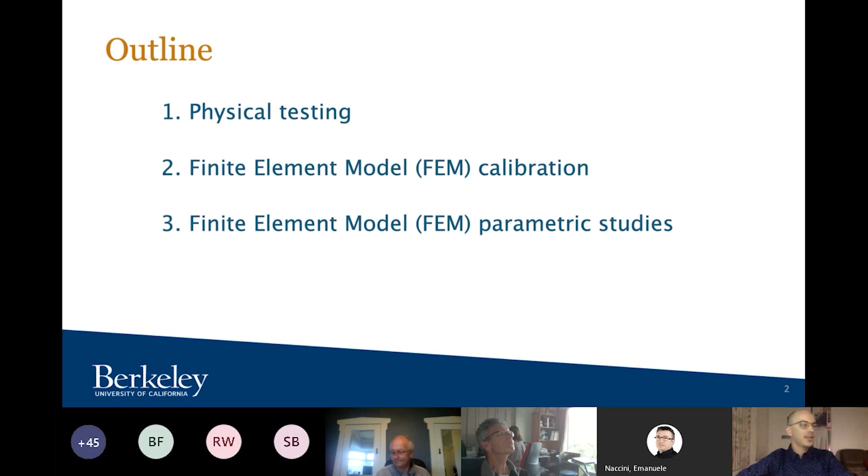So let's get started. My presentation will first talk about the physical tests that we've run here. Then I'll explain the finite element model calibrations that we've been working on, and finally some of the parametric studies.

So just to make sure we're all on the same page, I'm talking about what you see on the screen: column foundation connections with cast-in-place headed anchors. When you have your column, it has to connect to the foundation. We have to do that in some way, and cast-in-place anchors are one of the most common ways to do that. So on the picture on your right, you can see what these connections might look like.

Before the concrete is cast, you have the rebar, the slab, and you have to hold the anchor in place. You might not see it in the picture, but at the base of the anchor, there has to be some kind of head, a nut, a bulb, or something, so that when you pull the anchor out, it gets stuck in the concrete.

Once you pour the concrete and remove the forms, the tops of the anchors are sticking out, and then you place the column on top and you can bolt it down with some type of anchor. This is a very common construction type in the US, and I'm assuming in New Zealand as well.

But even though it is very common, there isn't much consensus as to how these should be designed, which is somewhat concerning given how common these connections are. I'm focusing mainly on the concrete portion of these connections, not so much the base plate and the welds and that sort. I'm talking about the failure of the concrete.

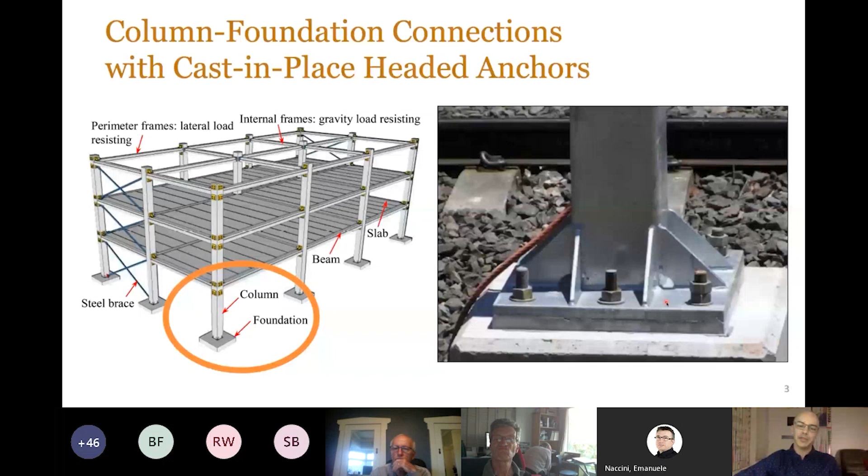There are multiple methods for designing these connections, and there's very little agreement as to which method should be used when designing these anchors. One of these methods is what we call the breakout equations. It's chapter 17 in the American Concrete Institute code, and it also happens to be chapter 17 in the New Zealand code.

Basically, if you have a moment acting on a column that's resolved by a tension compression couple, and if this tensile force is large enough, this method says that you would expect to see a failure mode where you rip out a chunk of concrete in the shape of a cone. This failure mode is often called the concrete cone failure or the breakout cone failure mode.

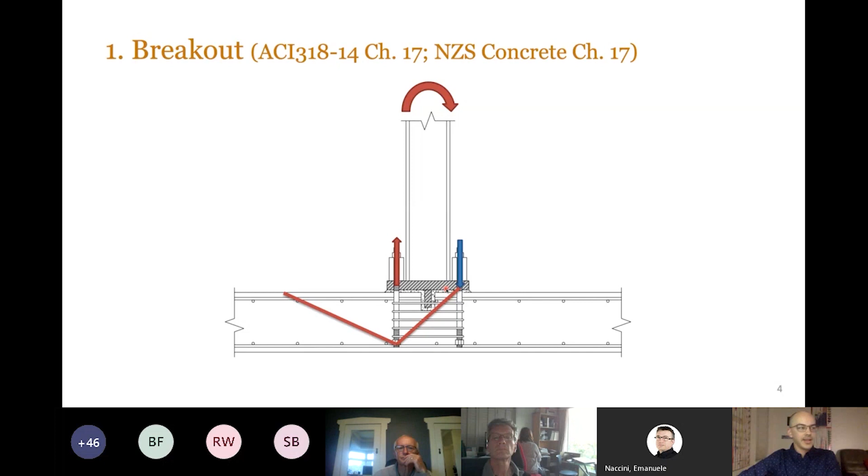And we have equations calibrated to calculate the strength of these connections. But these equations tend to be very conservative, and people try not to use them. Also, if you use any of the software by some of the fabricators of anchors, like Hilti and whatnot, they use this method. But a lot of people shy away from it. They say it's very conservative, which it is, and they argue that we should be able to use other methods.

Say this, number 2, strut-and-tie models. If we load the column in the same way, we have a tensile force on the left, but in this case, we'll have a diagonal compression strut along the joint. And the argument here is if you make that strut strong enough to be able to resist these forces, then you should be fine. You shouldn't get any kind of breakout cone, and we can ignore the breakout equations completely, not even have to check them.

Other engineers argue that even that's too complex. We can use this simpler version. How about we use the horizontal joint shear equations? These are just the traditional joint equations for concrete beam column joints.

If you look on the left, there's a diagram of a roof joint. So the column terminates and you have beams framing in from the sides. If we flip this upside down, the argument goes, the force flow is very similar, so these equations should apply to this type of connection. We simply have to size the joint such that the horizontal joint shear is resisted, and again, we can ignore the breakout failure modes, and we don't even have to check for them.

So we have 3 methods to design the same connection. That would be fine if these 3 methods gave us similar results, but they don't. There's about an order of magnitude difference between these results, and that's quite concerning, especially because it's not common that people check with these different methods. They just tend to pick one and stick with it.

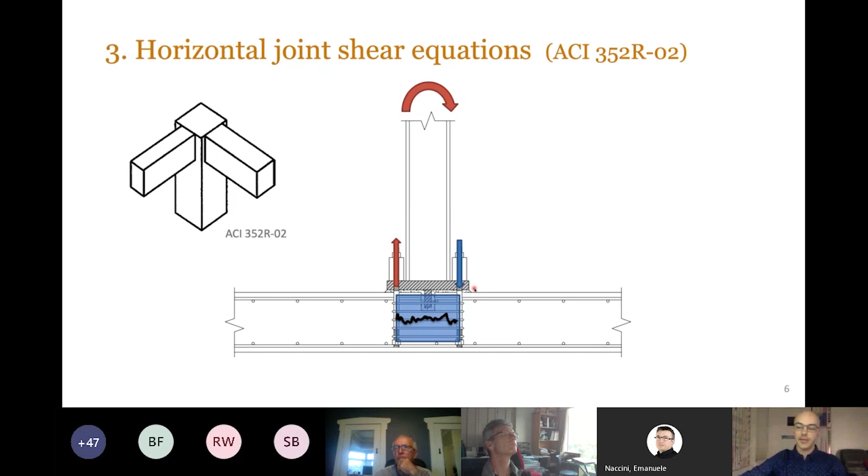So that was one of the first projects I did when I first started my work here at Berkeley. We designed and built and tested a full-scale column foundation connection. So here we have a steel column in the middle. It's anchored to the foundation with 2 anchor groups, one on each side. And we have our foundation slab along the bottom.

It's 18 inches thick, and you're going to have to forgive all my crazy American units. I grew up with the metric system in Costa Rica, but I've been here for 4 years and kind of gotten used to these crazy units, about 45 centimeters or so thick.

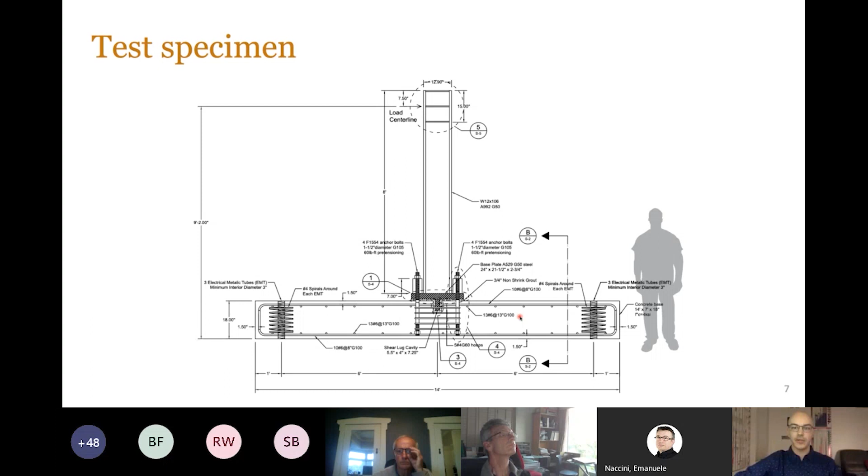So as you can see, this is quite concerning. These equations are very different, and we're trying to analyze one connection. We shouldn't have such a difference here.

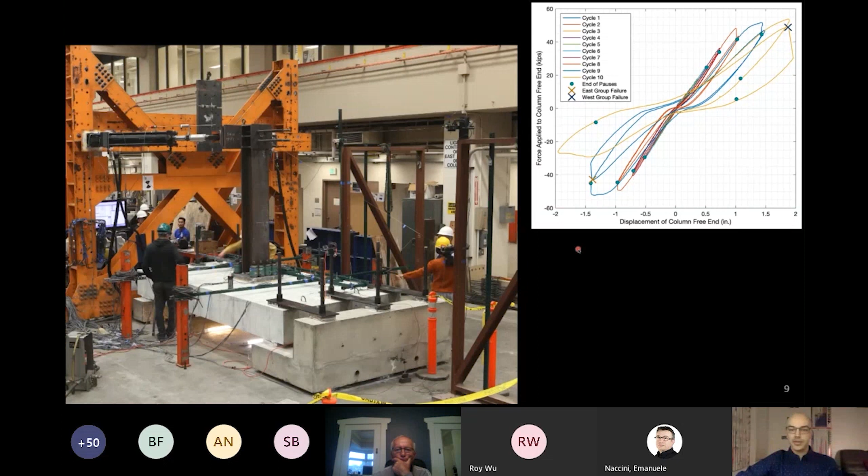One of the first observations that we wanted to see with this test is what failure mode do we get? Each of these 3 methods describes a different failure mode: concrete cone failure, joint failure, etc. So the first thing we looked for was what kind of failure did we get?

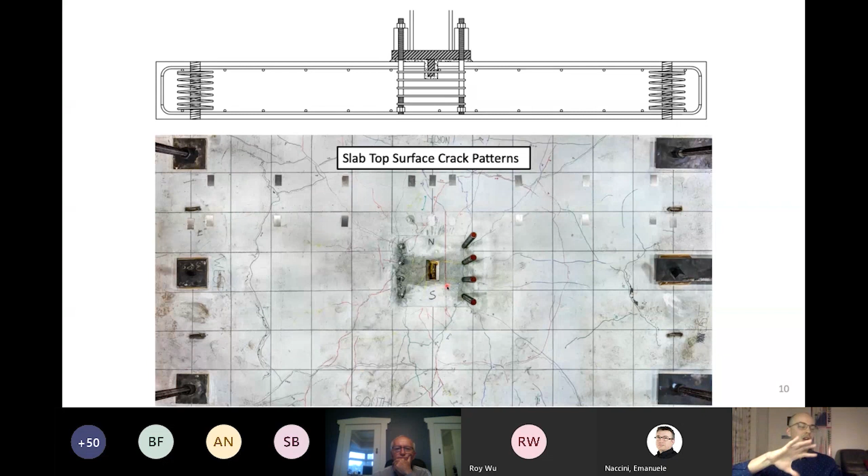Here on the top, you can see a cross-section of the slab, and on the bottom, I'm showing a picture of the top surface of the slab after testing, so you can see all the cracks that were highlighted there. I wanted to point out the failure cones. We did, in fact, see concrete failure cones, even though the proponents of the Strut-and-tie models say that these failure cones don't happen for this geometry. We did see them.

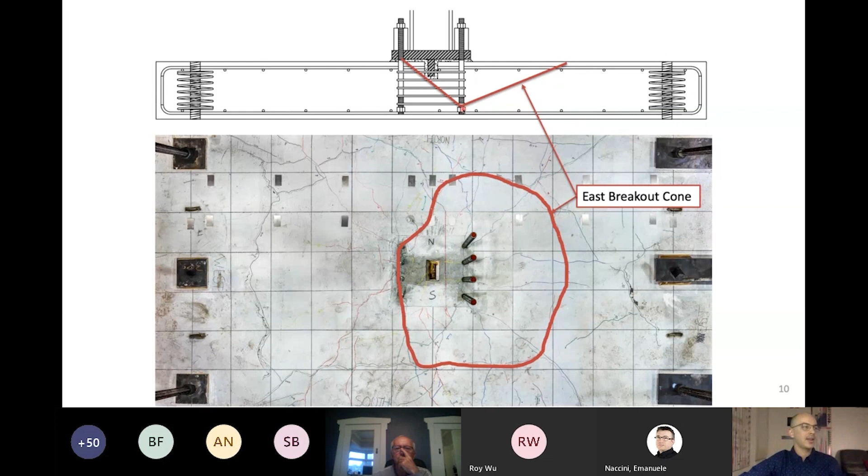As we were loading in one direction, we saw one cone. The cone originates at the head, and as it shoots up towards the surface, when it intersects the surface, we get a more or less circular pattern. So we saw that crack on one side. Then we loaded in the other direction, and we also got our breakout failure cone.

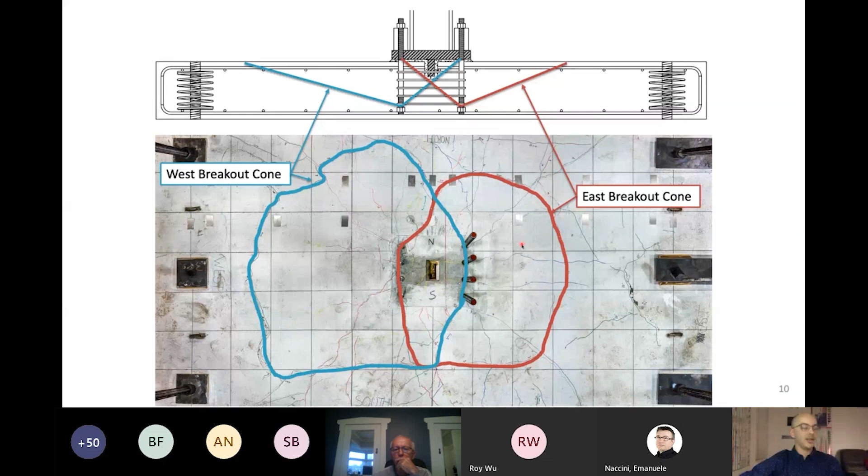So that should maybe give you an idea of what method might be the most appropriate for designing these connections. If we saw a breakout failure, maybe the breakout equations would be the best.

So if I bring back this table or graph I showed you before with the load that each method predicted, I can add 2 columns for the measured loads. Even though we just had one specimen, we had 2 anchor groups, east and west, so we have 2 failure loads. If we take the average of these 2 as 100%, the breakout equations, even with all the safety

factors taken out, only reach 58% of what was experimentally observed. So these breakout equations still seem to be conservative, even after taking out some of these additional safety factors in these methods. Strut-and-tie model is way too low.

It really only serves as a lower bound solution. So the Strut-and-tie model tells us that our connection will resist more than 107 kilonewtons, which is correct, but not very useful for design.

And thirdly, the beam column joint equations don't seem to be a safe alternative. They over-predicted the strength by about 60%.

So because of this type of failure, we saw breakout type failure. It seems like these equations should be able to describe this type of failure, but they were quite conservative. So we are looking into reasons for this conservatism.

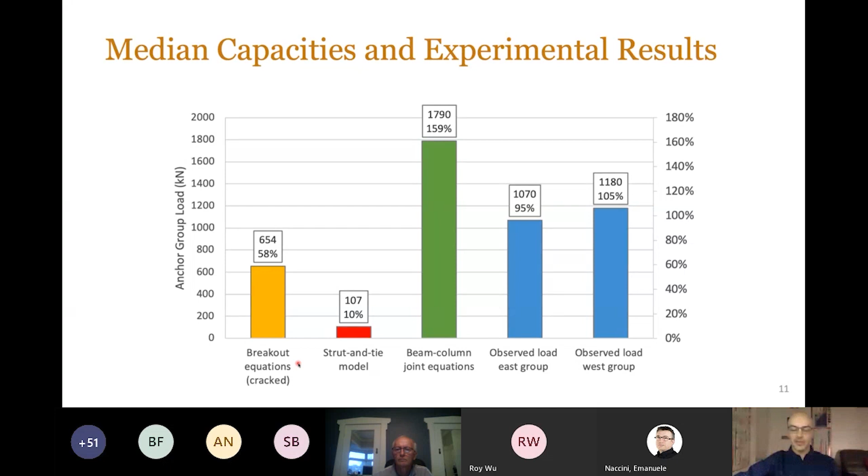So we started using software called ATENA for finite element modeling. It's not one of the more well-known softwares for reinforced concrete elements, but it was developed specifically for reinforced concrete. The way it deals with concrete is different from any other software, and it seems to behave really well. We tend to get good results with this software. It was developed in the Czech Republic, and for quite some time now, they tend to do very well whenever there are blind prediction competitions.

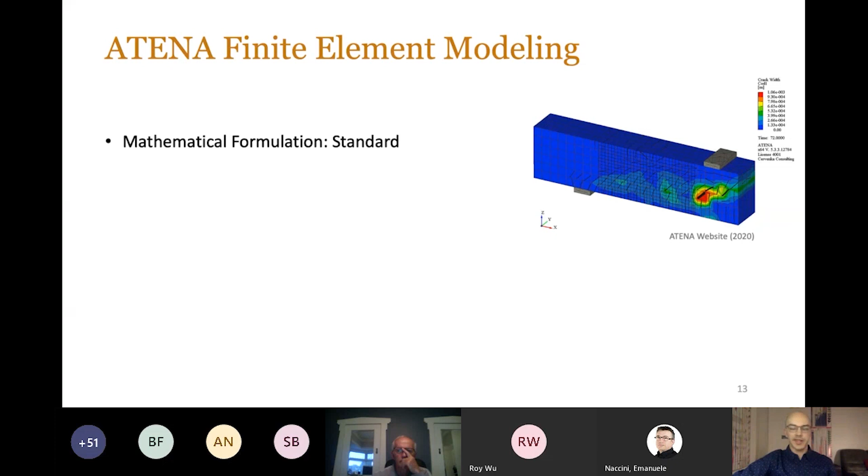So we decided to use this software, and there's just a couple aspects of the software I wanted to highlight for you. First, the mathematical formulation for this finite element software is very standard. There's nothing too noteworthy about it. What makes it different is the material model, how it describes concrete, and specifically how it describes concrete in tension.

One of the initial basic assumptions when designing with concrete, you start off by assuming concrete has no tensile capacity. That is usually a conservative simplification, and the results are good enough to work with. But for anchors, when you anchor something into concrete, it's really the tensile capacity of concrete that holds anchors in place. If you were to ignore the tensile capacity of concrete, anchors would just be falling out of the walls, but they don't. So the tensile capacity of concrete is what we're really interested in.

The technical term for this model is that it's an orthotropic smeared crack formulation with a crack band model. And there's a few aspects about it I wanted to highlight.

First is the exponential softening. So when you load concrete in tension, it usually follows an elastic curve up until you reach the maximum tensile stress. After that point, you get a crack that forms, but it's not a sudden drop in capacity. There is an exponential softening as you slowly drop in stress. That's the diagram I'm showing here on the right. This is the stress along the crack on the vertical axis, and the crack width on the other axis. So as the crack opens, the stress drops slowly, it drops exponentially.

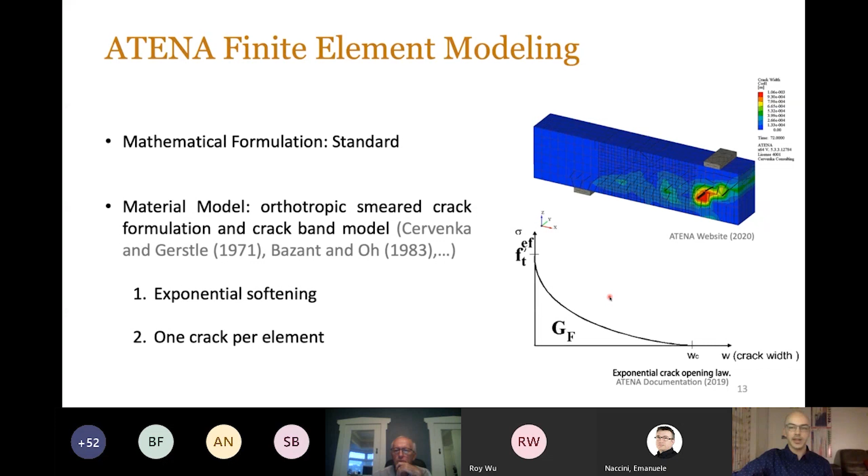So we decided to use this software and build up a finite element model of our connection, to try to run some parametric studies and understand the behavior of these connections a little bit better.

And we had to start off by calibrating this model. Just to define the concrete material, there are over 20 parameters that must be calibrated. There are different ways you could try to model the anchor itself. You could think of it as just a 1D element that only carries tension, or you could try to model the full anchor itself. There are also different contacts between the concrete and the steel. So how does the anchor interact with the concrete? Also, how does the base plate, as it pushes down on the concrete, how is that contact defined?

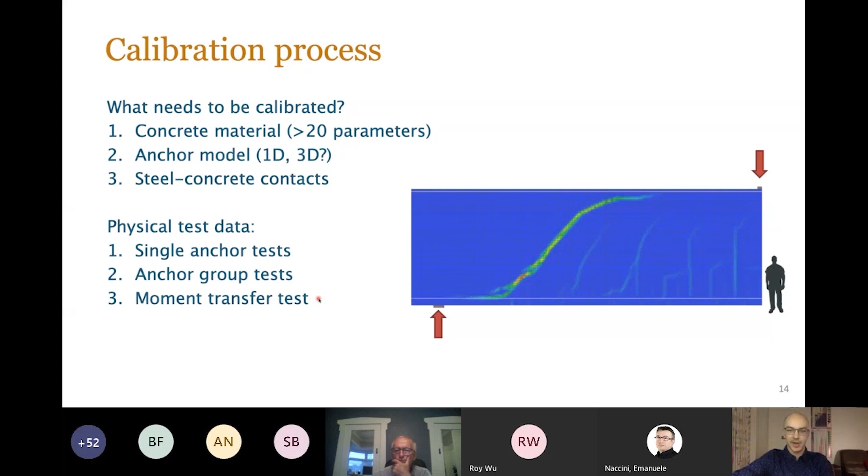So in order to get all these aspects right, we used a lot of physical data to calibrate our models. We had a lot of single anchor tests. Then we moved on to groups of anchors. And finally, we calibrated the moment transfer test, the original experiment I showed you at the beginning.

But we decided, let me go back one slide.

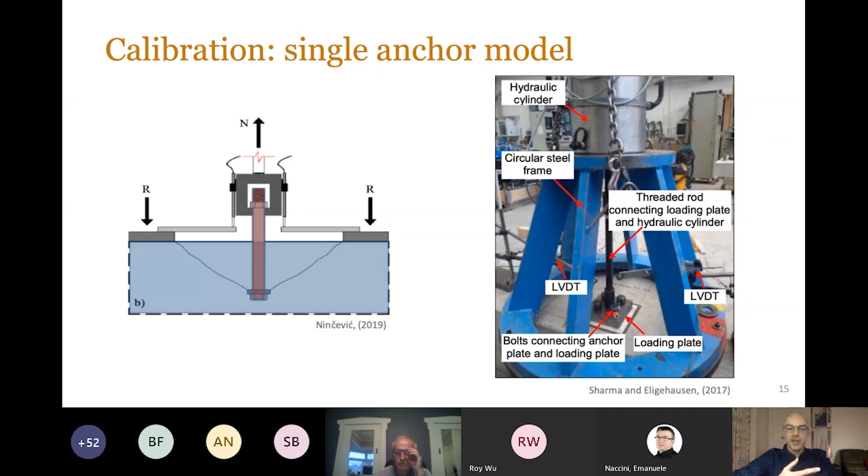With this data, what we did was create a finite element model to try to simulate this experiment. This experiment is symmetric in the x and y direction, so we only need to model a quarter of it, because each quarter behaves exactly the same. So that's what I'm showing here.

If you focus on the left, this is a quarter of the specimen. The steel anchor is placed here in the middle. It's being pulled up, and out here you should see the outline of the ring support, which is holding it down. The colors on this diagram are showing the width of the crack as it opens up. So the cracks originate at the anchor head, which is here. I turned off the steel material so we could see the concrete better, but the anchor is placed right here in this corner.

You can see the cracks as they propagate towards the surface form a cone shape. And if this video should work, you can see where the cracks originate at the head and shoot up towards the surface as we load.

On the right, I'm showing the tensile stresses, so the redder means the higher the tension stress. What you can see in this diagram is that as the crack opens, the stresses start to drop along that crack. That means the crack has opened, and not only did we see the crack open, but it opened so far that there are no longer stresses traveling across that plane, because remember that we have the exponential softening after you reach the peak stress.

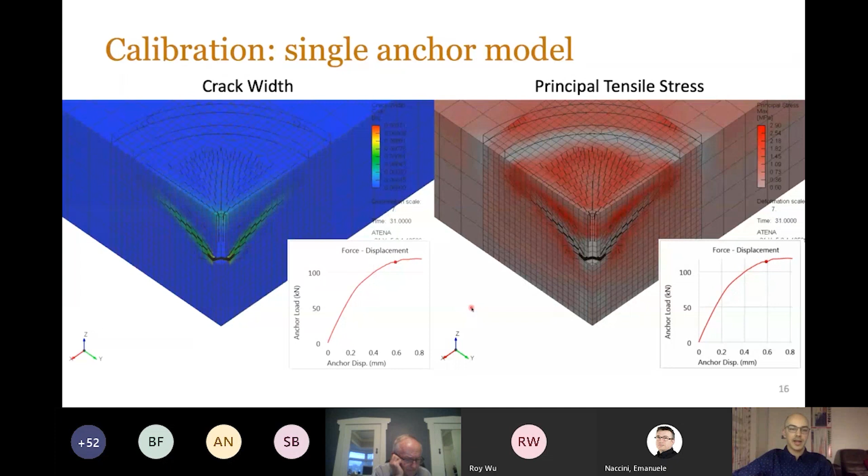Once we had these crack patterns behaving correctly, it makes sense to move on and look at the load displacement curves. So I'll show you that right now.

These two diagrams show in gray some experimental results from single anchor tests. I wanted to highlight here on the left, even though these are four physical tests of identical anchors placed in the same concrete, there's quite a lot of variation in the peak strength. This one failed at about 120 kilonewtons, this one at about 100, so there's about a 20% variation in the strengths of these anchors. This is experimental data, so it's challenging to calibrate a finite element model to a phenomenon that's quite variable itself.

To try to get this spread of the data and understand it a bit better, in all the diagrams I'm going to show you, we ran multiple finite element models, with different mesh sizes and slightly different concrete properties to try to get the spread of the data a little bit better. Even the developers of this software themselves admit that if your finite element results are plus or minus 15% compared to the physical test, that's considered a very successful model.

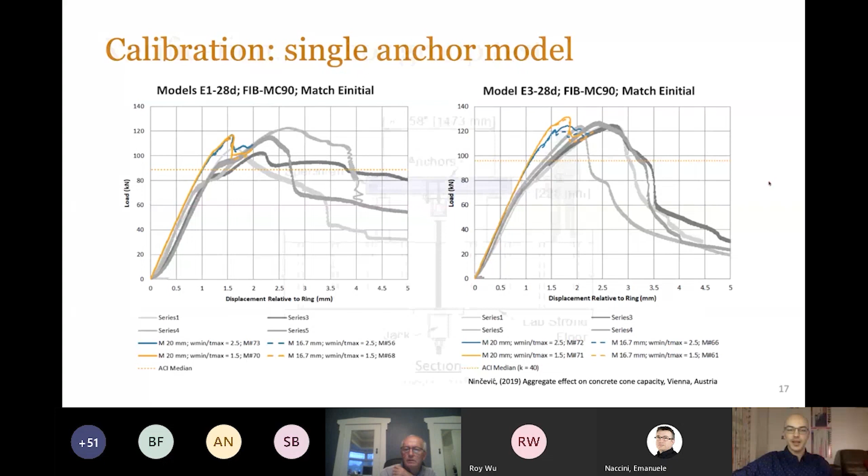With those lessons learned, we moved on to the calibration of some group anchor tests. These groups of anchors were actually tested here at Berkeley as well, by another graduate student a few years ago.

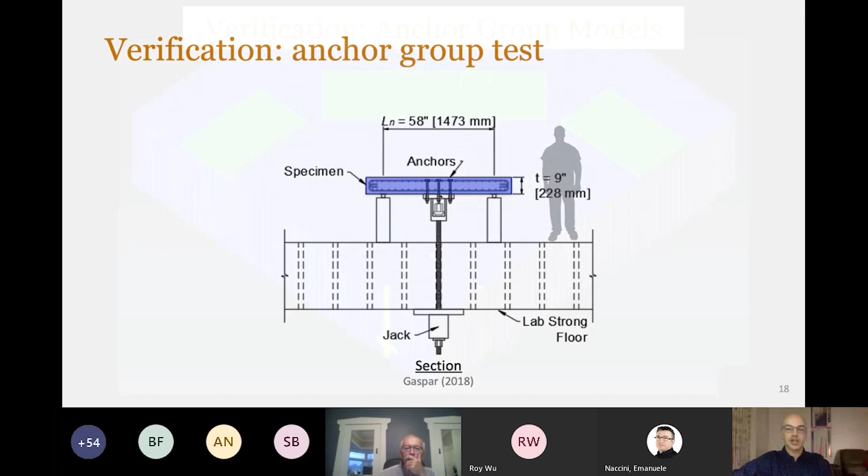In these tests, we have our concrete slab here, and we have our anchors, which are attached from the bottom, and we're pulling down on these anchors. This experiment was also symmetric in the X and Y directions, so the model we built is just a quarter model. Every quarter behaves exactly the same.

Here I flipped it upside down, so you can see the anchors. These are being pulled up. These green plates on the top are the reaction plates.

I just wanted to stop here a second and ask you, what should the crack patterns look like? If this model works correctly, the crack patterns should make sense with the experimental data, but you should also start to get a feel of what these patterns should look like.

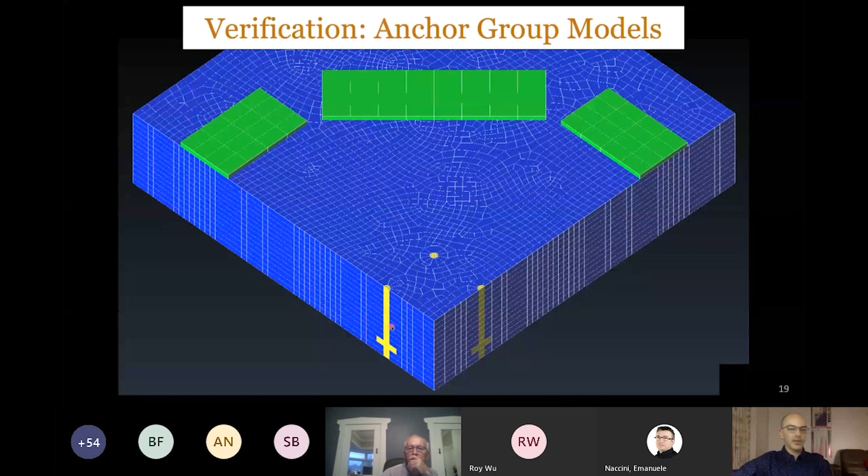So if I go forward one slide, on the right here you can see the crack patterns. At first, as we loaded this model, we started to get a lot of surface cracking. This is flexural cracking, just because we have a large slab. This flexural cracking was significant. Then at some point later on, we got this nice cone-shaped failure.

The colors are representing how wide the crack has opened. Also, these anchors are placed closely enough together that their cones don't form an individual cone each, they form a group cone here.

This was consistent with the experimental results, depending on the size of the screen you're looking at this on. It might be hard to see, but here on the left, we did see a lot of flexural cracking, and then we had a sudden cone failure.

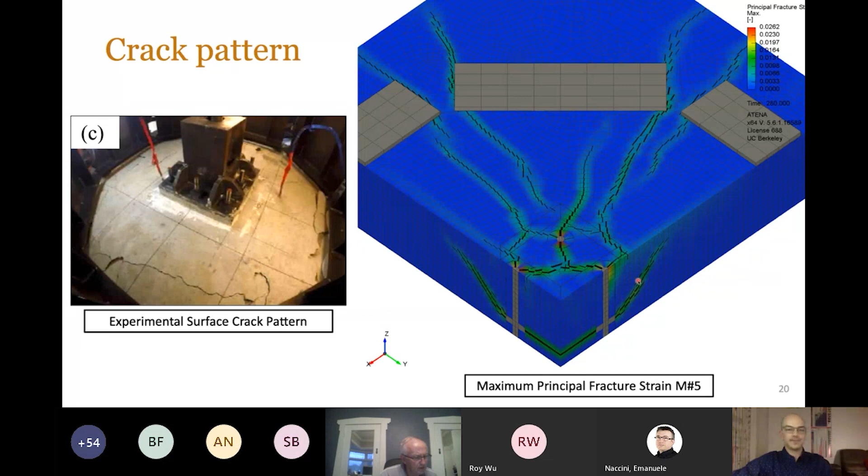So now that the crack pattern makes sense, we moved over to the load displacement curve. The gray line represents the experimental results, and we have 4 different finite element models with different mesh sizes, slightly different concrete properties. One thing we were quite happy with these models is that we were able to match the initial stiffness, the elastic stiffness.

If we hadn't been able to match the initial stiffness, I wouldn't trust anything after that once cracking and softening starts happening. So thankfully, we were able to match the initial stiffness very well. We had to do very little tweaking with the principles we learned from the single anchor tests moving over to the group anchors. And the peak load seems to match pretty well.

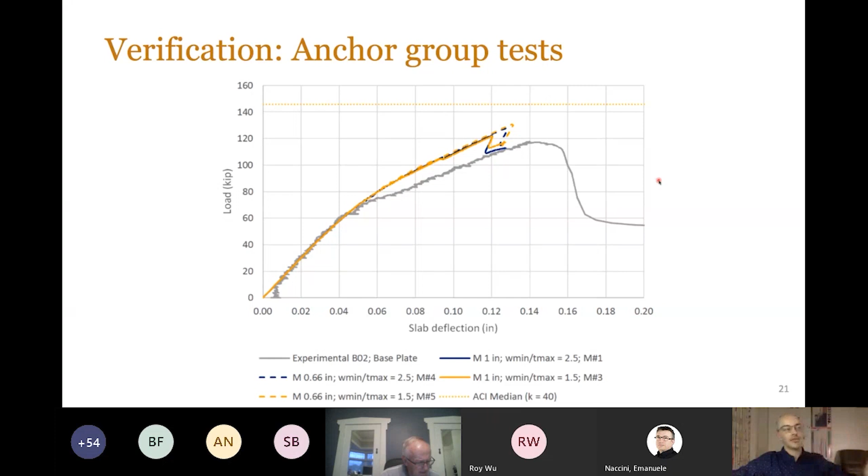Pretty happy with this. So we calibrated our models with different group anchor tests. This is just one I'm showing you. Once we did that, we were finally able to move back to the original goal, which was to model these moment transfer tests.

This specimen is only symmetric in one axis, so we did have to build half of a specimen. We couldn't go all the way down to a quarter. So here I'm showing the steel and fine concrete.

The pink layer is the fine concrete layer because that's where we expect most of the damage, and then coarser concrete towards the ends. If I turn off the concrete layer, you can see the rebar placement. We have a top mesh of rebar, bottom mesh, and then some hoops around the anchors. You can also see the anchors themselves are modeled as full 3D elements.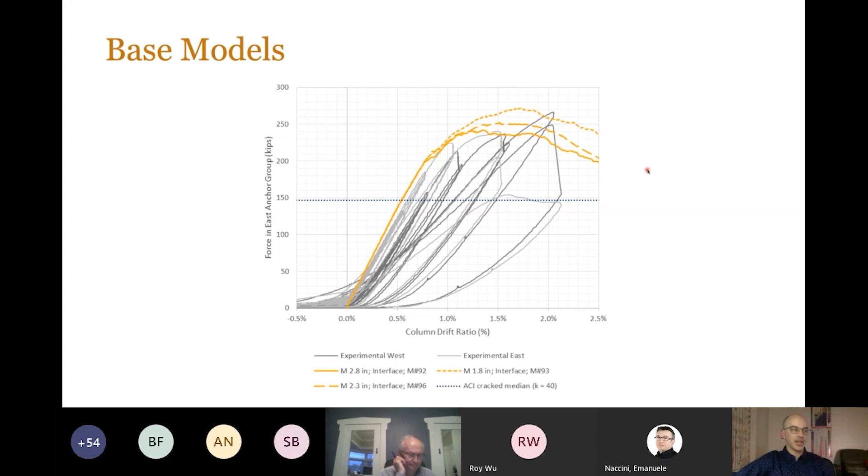So that was part 2 of the presentation, the calibration process. We spent a lot of time trying to calibrate these models because right now we're moving into parametric studies. I'm going to use this model to investigate some other types of geometry. Really what we're doing is extrapolating, and you have to be very careful when you extrapolate without physical data. We're basing ourselves on a physical test, but extrapolating out from there. So in order to build the most robust model we could, we went through the long process of calibrating our model with lots of single anchor tests, group anchors, and moment tests to build a model that's robust enough to extrapolate a bit.

This is the part of the research I'm working on right now. I'm using these parametric studies to investigate how we can improve these connections, how we can improve the breakout equations, and why they seem so conservative.

One of the most interesting or promising aspects about these connections is slab shear reinforcement. These specimens we tested had no shear reinforcement—it looks like the model on the left, with a mesh on top, a mesh on the bottom, and hoops. But what if we add shear reinforcement to this slab? There's another research project going on here at Berkeley looking at the benefits of adding shear reinforcement to foundation slabs, and it's becoming more common, especially for very tall buildings.

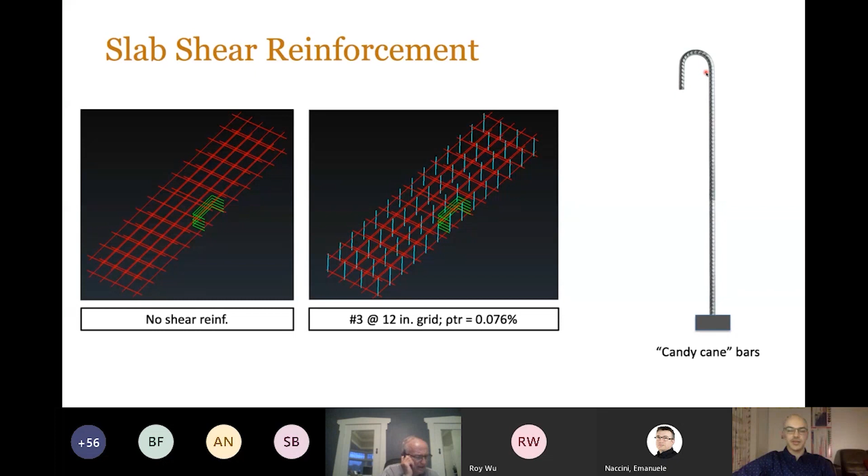So our question was, would that increase the strength of your column foundation connections? We ran different models with different amounts of reinforcing. This model here in the middle has about 0.076% reinforcing—that's just the area of the rebar divided by its tributary concrete area.

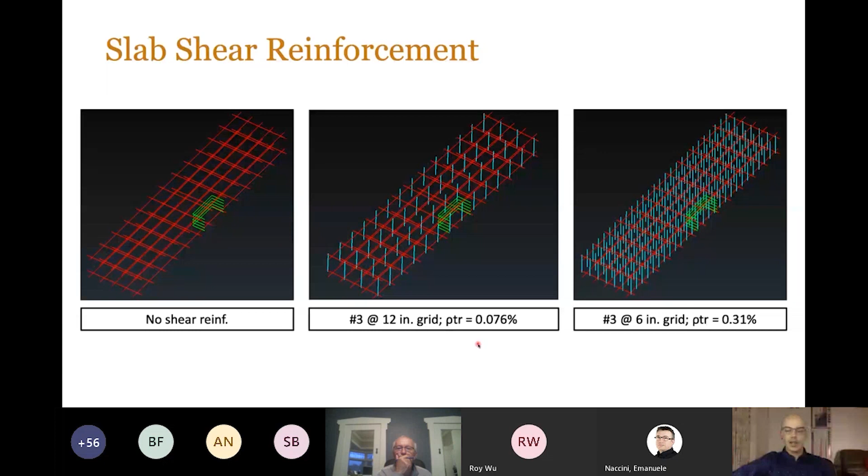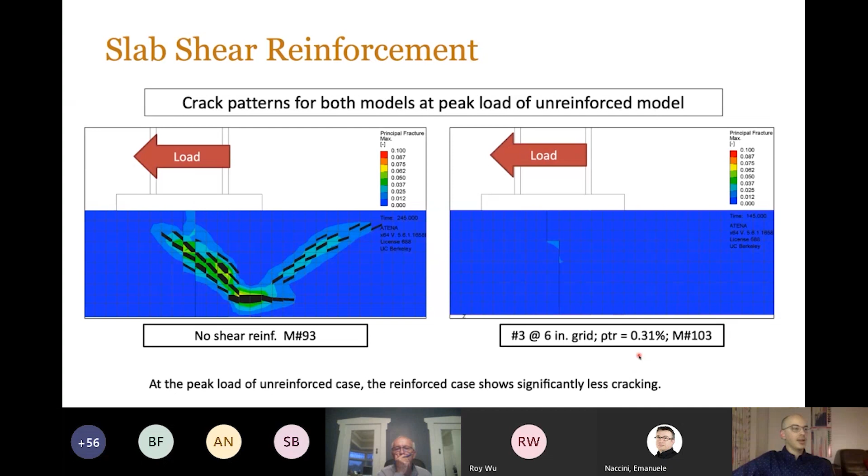Once again, let's look at the crack patterns—what happens with cracks when you add shear reinforcing? On the left, I'm showing the original model with no shear reinforcing. As we load the column, we get our cone failure mode, which I've shown a couple times. On the right, I'm showing the model with a high amount of shear reinforcing at the same load as the one on the left. You can see they're both loaded to the same load: the one on the left has failed, has no shear reinforcement; the one on the right is barely cracked. If we continue loading the one on the right, we do eventually get a cone type failure, but at a much higher load.

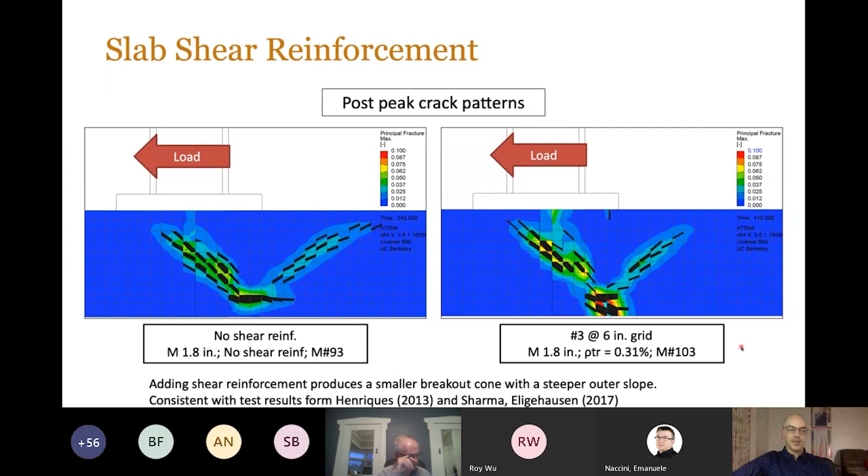This also makes sense with some of the few tests that have been run on how anchors and rebar interact. Different researchers have found that when you add rebar to these connections, the shape of the cone changes—instead of a very wide open cone, you get a much steeper, smaller cone. So these crack patterns seem to make sense.

It looks like if we add enough shear reinforcement, it boosts the breakout strength so much that the failure mode changes—we stop getting clear cones and start getting joint failures. I'll show that in the next slide.

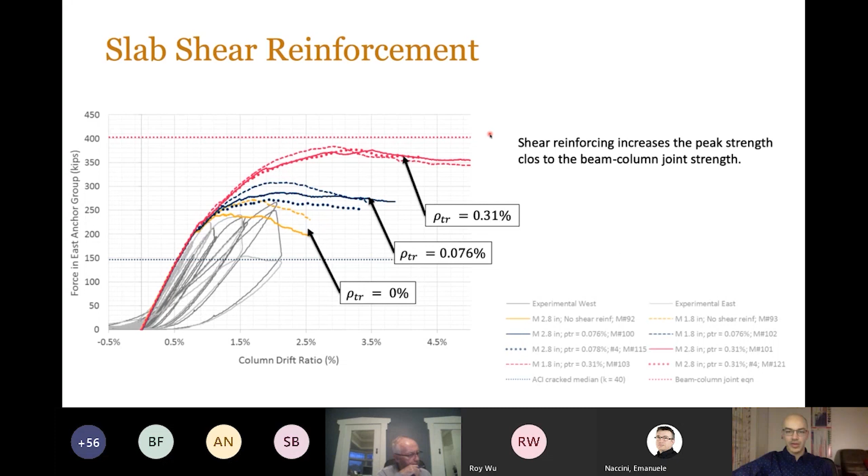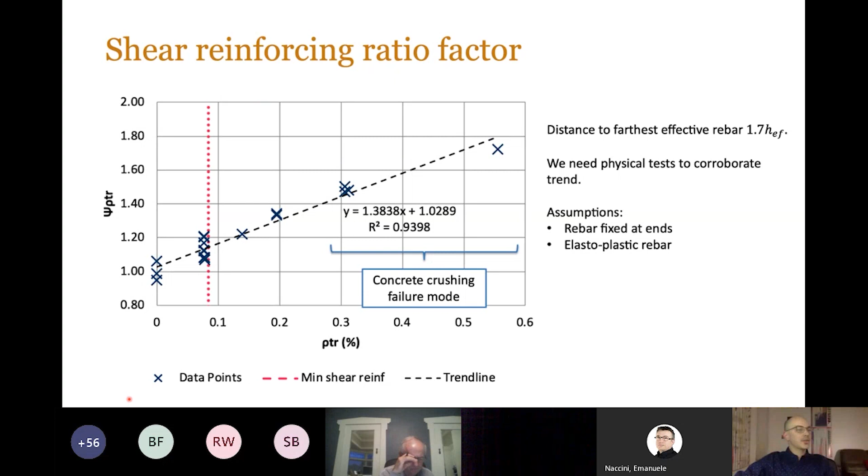And hopefully we'll be able to improve the breakout equations by including some factor that considers shear reinforcing. There's one other effect that might be why these results were so conservative, and that is the base plate compressive force.

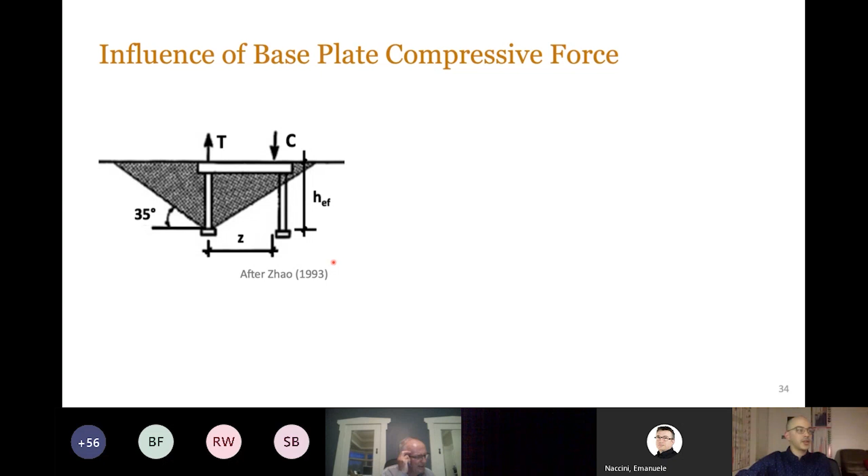So this might be one of the things that gave our experiment a boost in strength, and that's something the code doesn't consider. Neither the American code nor the New Zealand code have this factor in it, but the Euro codes do, in fact. So I'm showing some of these diagrams of the different factors that have been proposed.

Do these trends still hold? Hopefully we'll be able to get back into the lab and get these tests ready. Maybe we can suggest to the committees that these factors are important and should be included in our design codes, to better understand how these failure modes happen rather than just picking whichever method I like, which seems to be what's happening nowadays.

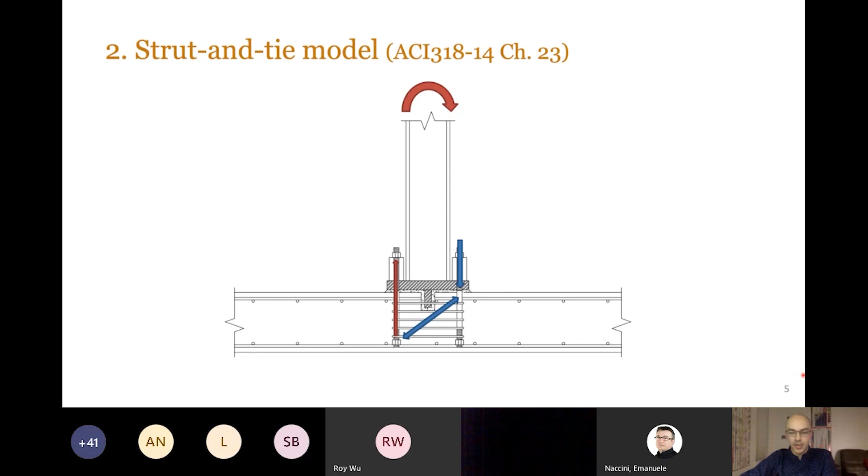The limiting factor for this one, if I bring back the diagram that shows the Strut-and-tie model had very low strength - the limiting factor was actually the head of the anchor. The anchor head is so small that this diagonal strut has to concentrate all its force down into this very small area, and that's what limits the strength of the connection. So it would be interesting to see, add in the annulus, as you call it, or add in some plates - what happens if we add a larger plate? Maybe the Strut-and-tie model might be more useful in that case.